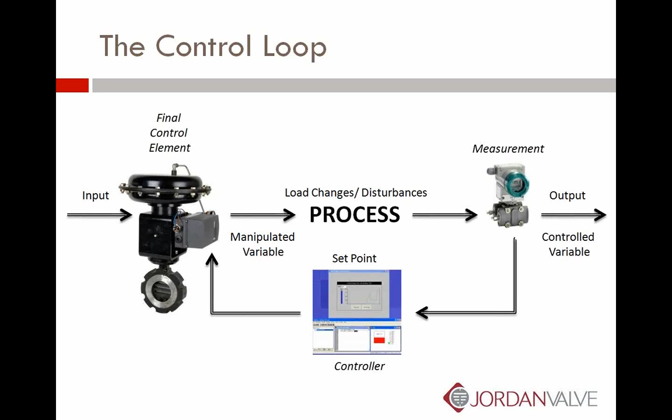A control loop. Wonder why a control loop, but I put a control loop up there because most people are familiar with control valves and control loops. It's one of the things that they teach in school, but they don't necessarily teach people about regulators. But regulators, you'll find, do a lot of the same things that control loops do.

The three major elements of a control loop are the sensing element, which measures the process variable being controlled, and that sends an output to the controlling instrument. The controlling instrument, or controller, calculates the error, which is the difference in signal from the sensing element and the desired set point, and sends a corrective signal to the final control element.

In a control loop, the final control element, which is the control valve, varies the flow to change the controlled variable to the required set point. So basically, a control valve is kind of a dumb device, and it needs something to tell it what to do. We're going to see that regulators have a lot in common with control loops.

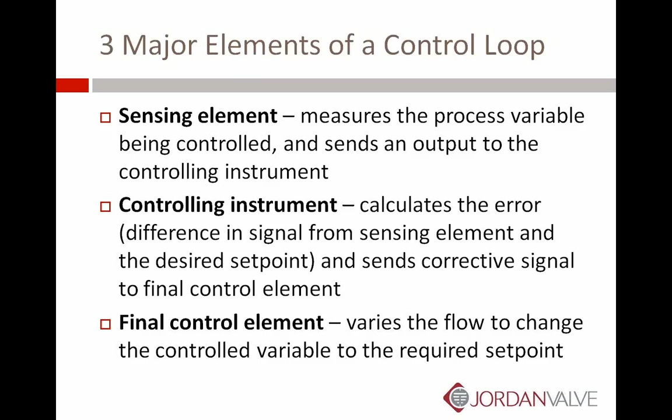Here's a quote from a gentleman named Hans Baumann. He says, properly utilized, regulators could replace control valves in at least 25% of all control loops. The reason this is a significant statement - for those of you who know who Hans Baumann is, you probably already know, but he's an inventor and engineer.

He has over 200 patents. He's a PhD in mechanical engineering. He's been published in the Instrument Engineer's Handbook, Control Valve Handbook, Noise and Vibration Control Engineering Handbook, and he also developed the Masoneilan Camflex valve, the Cashco Ranger, and the Baumann Little Scotty valve.

So here is a dyed-in-the-wool control valve guy, obviously one of the biggest influences in the development of control valves of the past generation, and he's saying that regulators could replace control valves in at least 25% of all control loops. Strong statement from a control valve guy. What does that mean to you? Regulators can be a great savings, again, in the proper application.

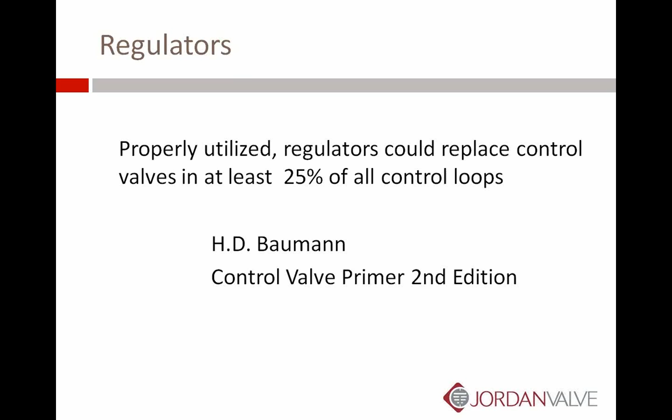Now, here you see a cutaway picture of a regulator, fairly simple device. You have a spring in the spring housing. You have the body of the valve where you have a diaphragm that rests between the spring housing and the valve body, and then you have a valve plug.

This is a cutaway of a pressure reducing valve, or what we call a PRV, and we want to control the downstream pressure, or the P2. When we talked about those similarities between a control loop and a regulator, you can see here that the spring acts as the controller, the diaphragm acts as the sensor, and the plug and stem mechanism make up the feedback mechanism. As the downstream pressure is sensed, it acts on the diaphragm, or the sensor, the pressure sensor in this case.

As it overcomes the spring, it will drive the spring up, and in this case, closing the valve, because you want to cut the pressure off once you reach the desired set point. As the pressure falls, again, the spring will overcome the diaphragm, moving the valve back to the open position. So it basically does the same thing as a control loop, only in a much smaller package.

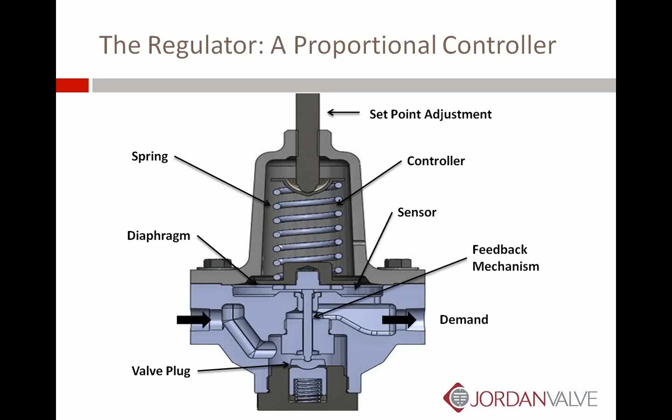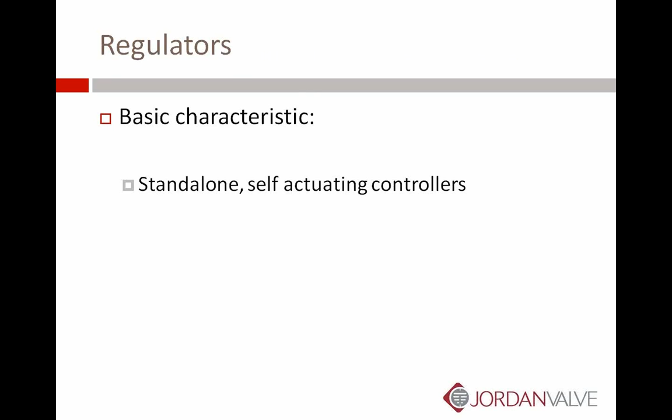Now we're going to give some things away to be able to take advantage of the simplicity, and we're going to talk about that as we move through the presentation today. So a regulator, the basic characteristic, you can consider it a standalone, self-actuating controller. What should you expect from a regulator?

All of the things we're going to talk about here are somewhat relative. So we're going to talk about accurate regulation. Is it as accurate as a control valve? No. However, you can have accuracies in regulators anywhere from 70% accurate to about 98% accurate, depending upon the regulator.

That you choose. Tight shutoff. Again, if you have a metal-seated valve, typically you're going to achieve ANSI Class 4 with a hard seat, and you can achieve ANSI Class 6 shutoff if you have a soft seat.

Fast response. Faster response than a control loop, because all the external communication doesn't have to take place when you're using a regulator. Minimum maintenance.

As you saw in the cutaway we looked at just a minute ago, there are not a lot of parts. It's a fairly simple design. Some manufacturers actually have smaller valves, 2-inch and under, that have no soft parts. There are no O-rings, there are no gaskets, really no soft parts to wear out at all. So minimum maintenance is simple, if needed at all. By design, they're low noise, and it's a low initial cost.

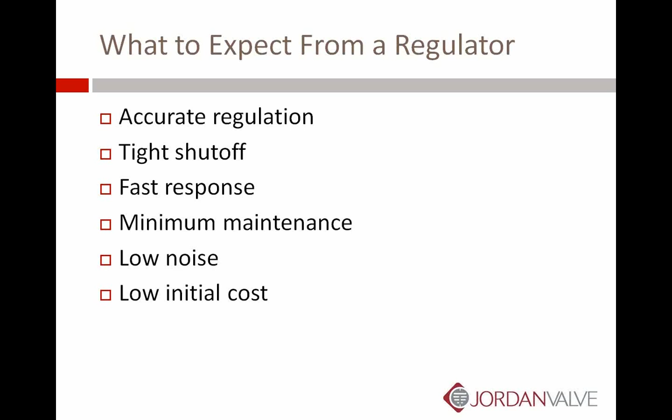And one important part on the maintenance element: if you have a control loop controlling pressure and it's not working correctly, you have a lot of different components to check. Is it the sensor? Is it the valve? Is it the programming of a PLC or DCS? There's a lot of different things that you have to check, whereas if you're using a mechanical device and you're having an issue, then troubleshooting is going to be a lot simpler.

Advantages of using a regulator. No external power is needed to position the valve. So you do not need air, you do not need electric, you don't even need an operator to go out and stroke the valve. No need for separate measuring elements or feedback controllers.

Once you go out and put the regulator in line and set it to your conditions, it is going to do what you set it up to do for a long, long time. Again, the designs tend to be simple, providing low cost, high reliability, and easy maintainability. The absence of stem packing eliminates external leakage and a high source of friction.

And regulators are in direct contact with the controlled variable and offer very fast response. As we saw in the cutaway, as the pressure acts underneath the diaphragm, it'll compress the spring, and depending upon whether it's a pressure reducing valve or a back pressure regulating valve, it will then move the sealing member to the appropriate position.

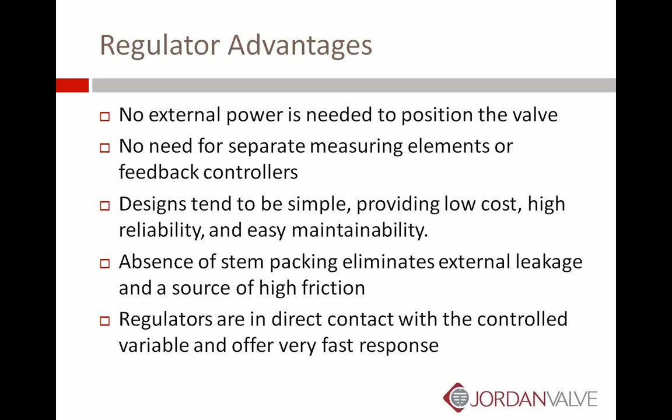Regulator limitations. The controlled media must be relatively clean and benign as materials of construction are limited. This has changed somewhat over the last several years. There are some manufacturers now that actually manufacture regulators in exotic materials. So the benign piece of this tends to not be as big an issue as it was in the past. However, the relatively clean aspect is still important.

Most manufacturers will actually recommend putting a strainer in front of a regulator as part of the preferred installation. Regulators lose controllability when the pressure drop across the valve becomes small because the media cannot supply enough operating power. If you have an extremely low delta P in a valve, sometimes that can be a problem. Many valves will actually state a minimum delta P requirement.

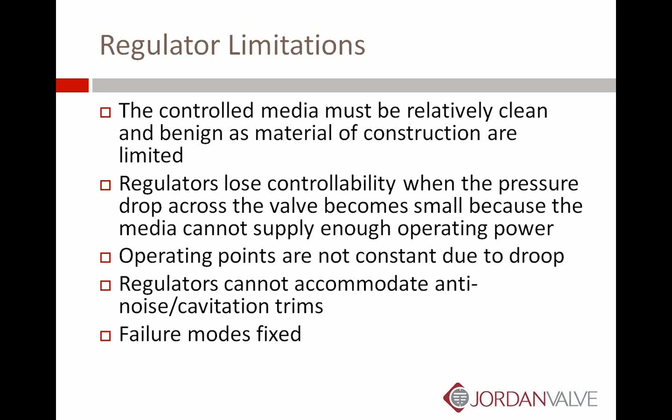Operating points are not constant due to droop. That's a term that may be new to some of you on the call today, but we'll cover that in the next few slides and talk about droop and how it relates to the accuracy of the regulator. But there will be some inaccuracies in the control just due to the design of regulators in general. Regulators cannot accommodate anti-noise or anti-cavitation trims, and failure modes are fixed. So those are some of the limitations that you run up against and you need to consider when specifying a regulator for an application.

Do not use a regulator when the desired pressure or temperature set point is beyond the range of a regulator. This one seems like a bit of a no-brainer, but again, this can be due to design, this can be due to materials of construction. Sometimes because of pressure and temperature considerations, you may have to move out of a regulator and into a control valve.

Don't use a regulator when process offset cannot be tolerated. If you need to be accurate within 1 to 2% or less, you're going to have to go to a control valve. Don't use when the pressure drop is extremely small or extremely great.

Don't use when a fail-safe feature is required. So if you need one to fail open or fail closed or fail last, you can't necessarily do that with a regulator. Sometimes, because of the way the valve is built, that might work out for you, but again, if you just have to pick one, it might not always be doable if you need a specific fail position.

If the system requires control of a multivariable process or if feedback is required, those are times when you want to avoid using a regulator.

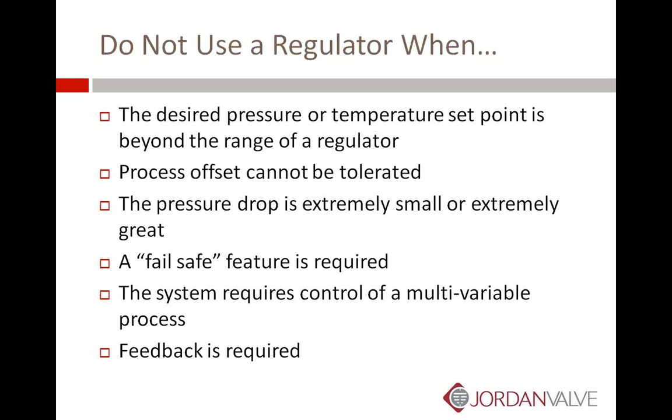Okay, here's that word droop again, or inaccuracy in regulators. It's also known as, or you might hear it referred to as, proportional band or offset, but it's the deviation from the set point as flow increases through the regulator. This is normally expressed as a percentage.

So if you have a set point of 100 psi, and when you get to full flow through the regulator your pressure is 80, then you would have droop of 20%, or 80% accuracy in the regulator. So the pressure falls below the set point in the pressure regulating valve. In a back pressure regulating valve, it's called build-up or gain.

Generally, the lower the droop, the better the regulator. Manufacturers typically specify ranges from 2% to 30%. Now, an important thing when you look at that, you think, oh, that's a massive range. And in fact it is, but you'll see where 3 different types of regulators each own a chunk of that 2% to 30% range. You have one type that's going to be 2 to 5%, one that's 5 to 10%, and the last, self-operated or direct-acting regulators, are going to take up the rest of that 10% to 30% range. So there is a hierarchy that we're going to discuss in regulators, and all 3 types are going to make up that 2% to 30%.

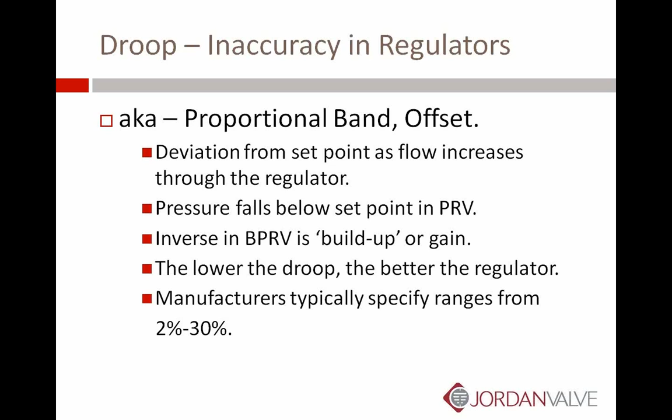Okay, there are 3 variables that determine droop in pressure regulators. Stroke length - the shorter, the better. So the shorter the stroke, the more accuracy you're going to have in a regulator. The diaphragm area - the larger, the more accurate. You see tank blanketing regulators with massive diaphragms, and those are ones where you don't want to see much droop and you need incredibly accurate regulation.

But that's not reasonable for manufacturers to put those massive diaphragms on every regulator that they manufacture. Additionally, oftentimes in your applications, you're not going to have the room to accommodate some of those massive diaphragm areas. And the diaphragm material has an impact here as well.

And then spring rate - the lighter the spring, the more sensitive the regulator. So you want to have a spring, or specify a spring rate in your regulator, that includes, of course, your set point, but is as close to that set point as you can possibly have, because that's going to give you much more accurate regulation.

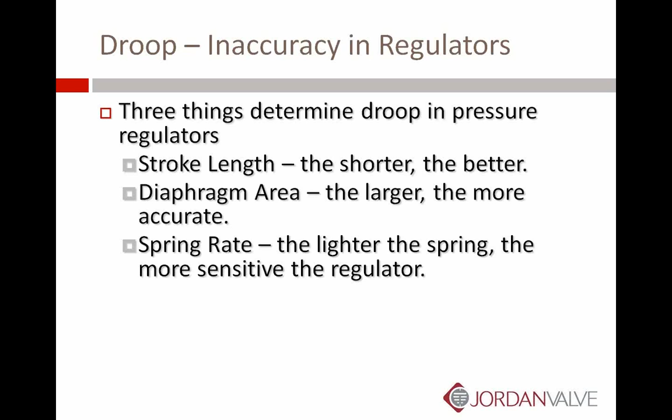This is a typical droop curve. You can see, if I can get my pointer to work - hopefully everybody can see that - but here's your set point. Let's say, for instance, this is 100 psi. And the regulator will droop off, and let's say when you get here, moving towards full flow, you get to 80 psi. So again, expressed as a percentage, you'd have 20% droop based on this particular curve.

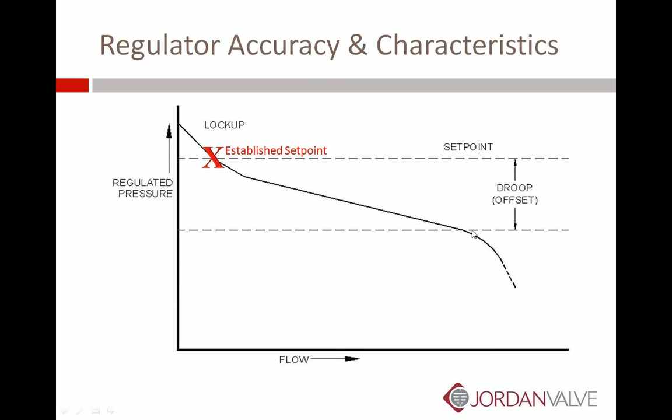Regulator sizing. A lot of problems - and one of the things that will help in the accuracy of regulation - is correctly sizing the regulator. And at a minimum, the information needed is the required flow capacity of the valve.

Usually users will always have normal, but it always helps if you have minimum, normal, and maximum. And if you have a minimum of 1,000 pounds an hour, but you have a maximum of 20,000 pounds an hour, that means you're going to have to be able to accommodate a 20-to-1 turndown. So that's important information to know.

Inlet pressure to the valve, obviously, and the outlet pressure or P2 - so in a pressure reducing valve, that's going to determine the set point. So, again, your inlet pressure could be 150 psi, and you want to reduce it to 80 psi to use at other places in the plant. So that's why that's important to know.

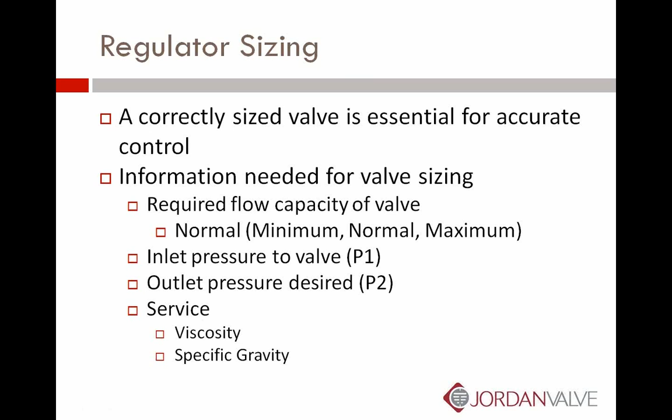And also the service - the media, viscosity, and specific gravity. So generally, the more the manufacturer knows, the more they're going to be able to help you choose the right regulator for your application. Generally, you can use an ISA control valve data sheet.

A lot of the same material or information is going to apply. At a minimum, the requirements are inlet pressure, outlet pressure, flow rate, and the medium. The more manufacturers know about your process conditions and what you're trying to do with the valve, the better fit you're going to get, and the best service life you can possibly get. So have that minimum, normal, and maximum condition, temperature, service, viscosity, specific gravity, and so on. The more information a manufacturer has, the better they're going to be able to work with you and put you into the right product.

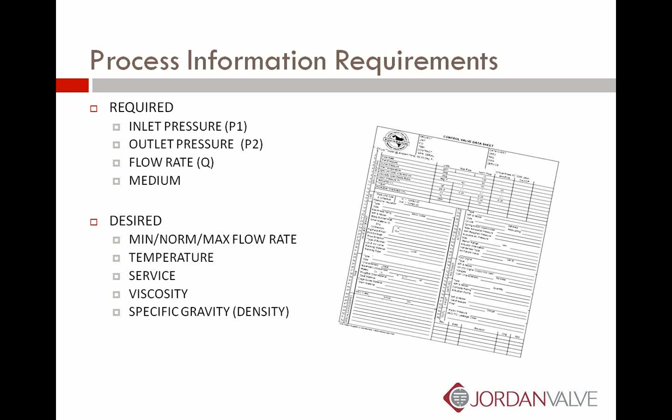Piloted regulators, this is where we have a small pilot valve that runs a bigger valve. So you have enlarged diaphragm surface areas on the big valve, and your droop comes down to 5 to 10%. So very much more accurate than a self-acting or direct-acting regulator.

And then finally, you have air-loaded regulators, where the spring is eliminated. So one of the three variables that go into the droop equation goes away. Droop here is generally in the 2% to 5% range. Sometimes you can even improve on that a little bit. But basically, what you're talking about here is regulation that's going to rival a control loop.

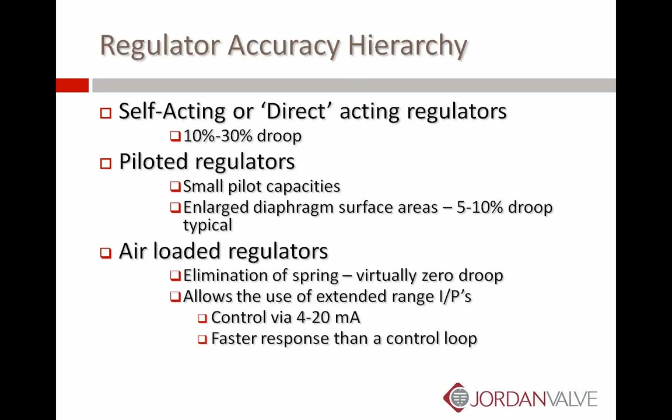So when you're looking at self-operated, it's faster and lower cost initially. Pilot-operated regulators offer higher accuracy and greater capacity. So those are a couple of things you want to consider when thinking about choosing a regulator.

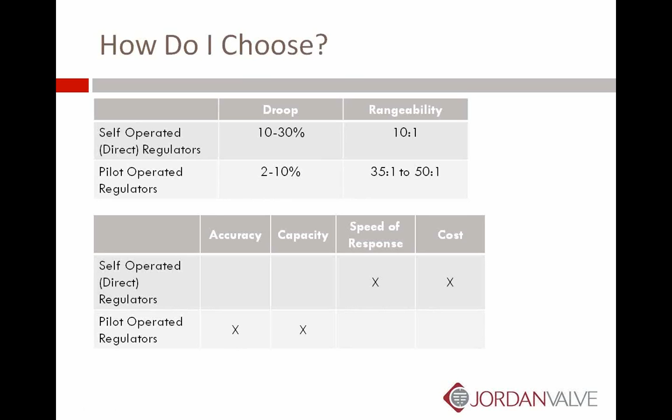Pressure regulators, or pressure-reducing valves, normally called PRVs, are self-operated devices which work off the medium alone. What this does is lower the inlet pressure to the desired set point. So we're talking here about controlling pressure only.

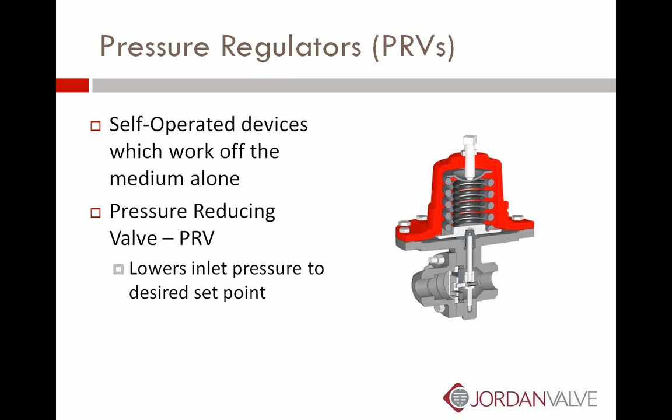Here's a cutaway of a pressure-reducing valve, and again you see the spring, the diaphragm. Here the sealing member is a little different than the one we looked at earlier, but you have your flow, which is P1. Let's say it's coming in here at 150 psi. You want to take it down to 100 psi, or P2, your controlled pressure, downstream pressure here. You put it in, you set it to your conditions, and it's regulating to 100 psi.

How does it do that? In self-operated valves, especially in smaller diameter valves, they have an internal pressure registration so it senses the downstream pressure up along the stem and up under the diaphragm. When this is in the normally open position, the springs keep it that way. So when you hit that set point and start to exceed it, the pressure acts on the underside of the diaphragm, compresses the springs, and takes the seats to the closed position. As it senses the pressure falling below that set point, the springs will overcome the line pressure and push the valve back towards the open position. That's how this modulates and regulates the downstream pressure.

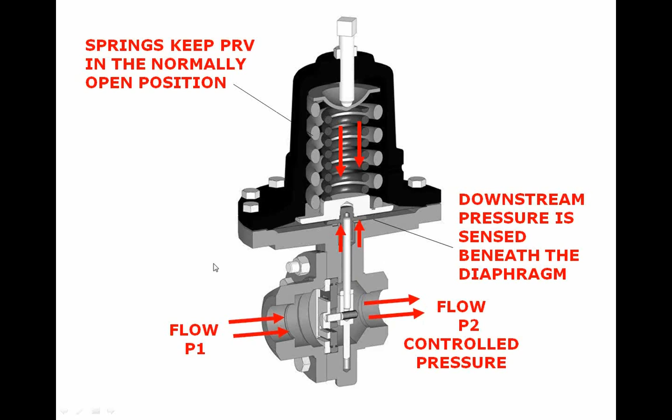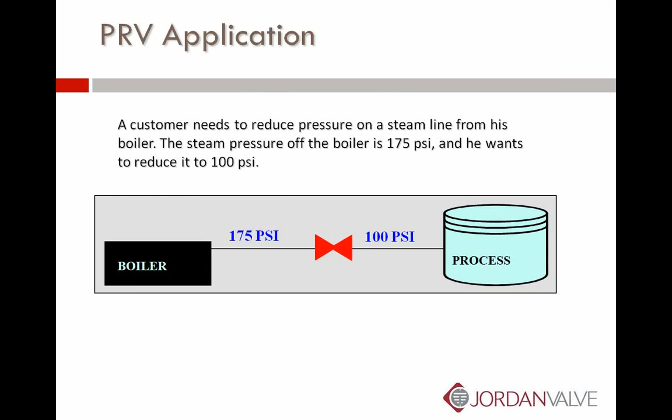Now we're going to start moving into that hierarchy of accuracy that we referred to earlier, and we're going to talk about piloted regulators. With a pilot regulator, the set point is determined by a pilot, which is a direct acting regulator, that controls the flow to or from the diaphragm of the larger valve.

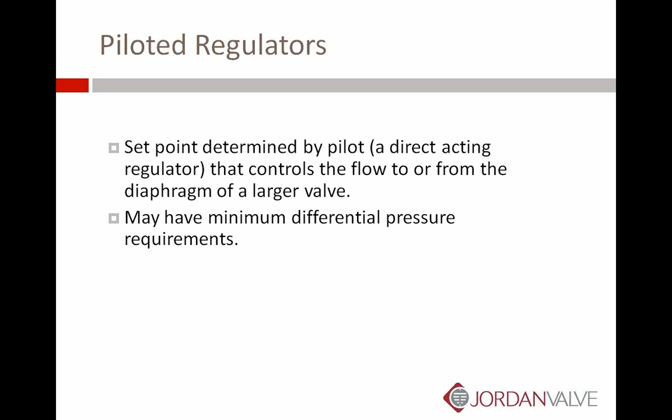Most piloted regulators do have a minimum differential pressure requirement. That will vary based on manufacturer, but normally they're in the range of 10 to 15 psi minimum delta P.

Extremely accurate. These are accurate now to within 5 to 10% of the set point, which, again, is much more accurate than a self-operated valve. Higher turn-down ratios, as high as 35 to 50 to 1. But again, it does require a minimum differential pressure and a downstream sensing tap.

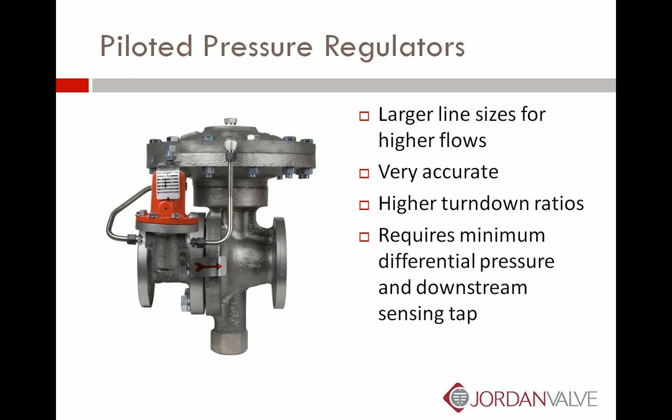On the self-operated regulator that we looked at earlier, that was an internally sensed or an internal registration. This is going to have an external registration, and underneath the diaphragm, you'll have a sensing line that's going to go sense the downstream pressure. That's going to send a signal up underneath the diaphragm to let you know, and you're going to control it to that pressure. You're going to respond to the pressure that's in the line.

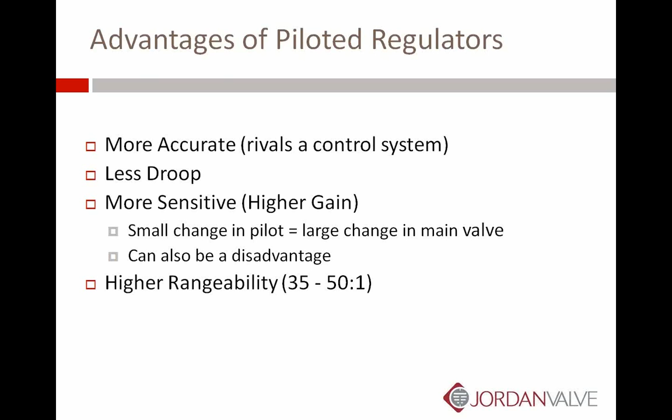The advantages of piloted regulators: more accurate. They begin to rival a control system. Less droop, again, 5 to 10% range. They're more sensitive, so a small change in the pilot is going to mean a large change in the main valve. This can also be a disadvantage, and we'll explore that in just a minute. And again, the higher rangeability, as high as 35 to 50 to 1.

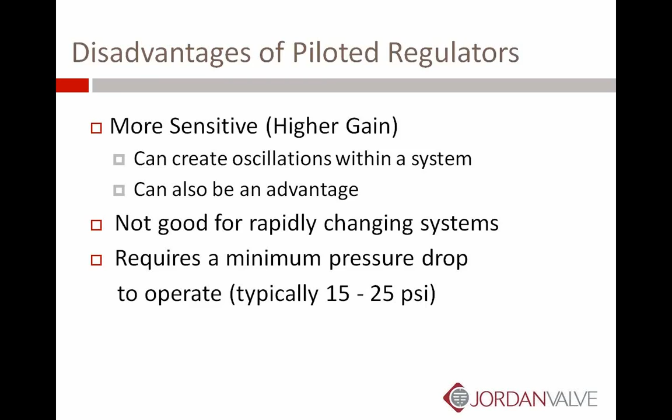You'll put an air signal across the top of the diaphragm, and that is how you determine your set point. So you need an air regulator or an I to P, but still this is much faster than a control loop. You have increased rangeability, low, if any, minimum delta P requirement.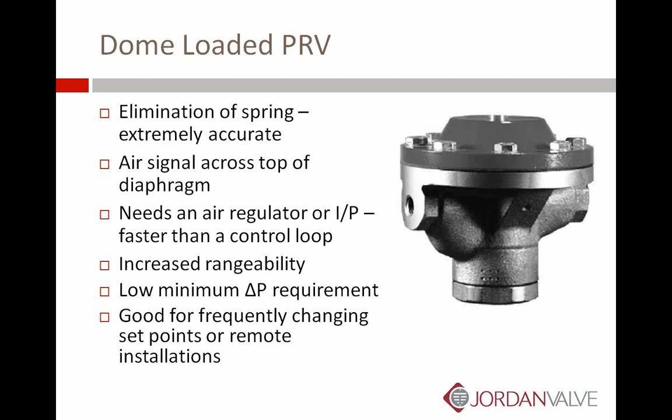These are excellent for frequently changing set points or remote installations. If you have a set point that might change several times a day or several times a week, you can take an air set or a point of use regulator and change the load on top, therefore changing your set point. Or if you have this 20 feet in the air, instead of having an operator have to take all the safety precautions and go up there and change the set point, this can be done remotely with a point of use regulator. So very handy in that regard.

Typical regulator applications: you have to use it in systems requiring control within 2% to 30%. And there are a myriad of set and forget functions: pump bypass, steam heating, pressure control, gas cylinder pressure control, tank blanketing, back pressure.

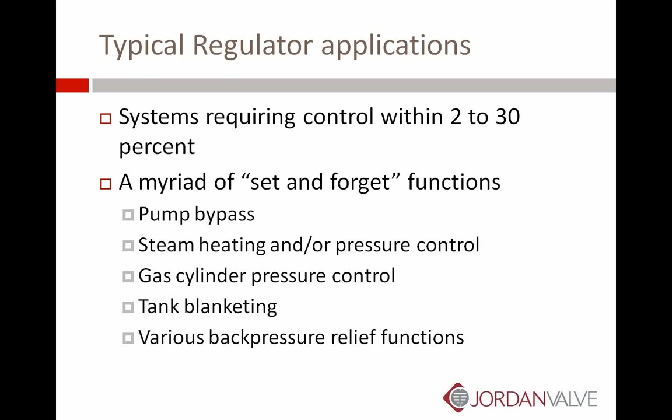You see regulators more than anywhere else in utility applications. So you're looking here, regulators tend to be excellent in steam, air and other industrial gases, both hot and cold water, lube oil, and any other utility application that you might be able to think of. Typically, regulators work particularly well there, and they're cost effective in those applications as well.

Now looking at back pressure regulating valves. These are designed to modulate and hold a specific back pressure. They're not a relief valve. They actually are modulating, regulating valves. They monitor and regulate upstream pressure here.

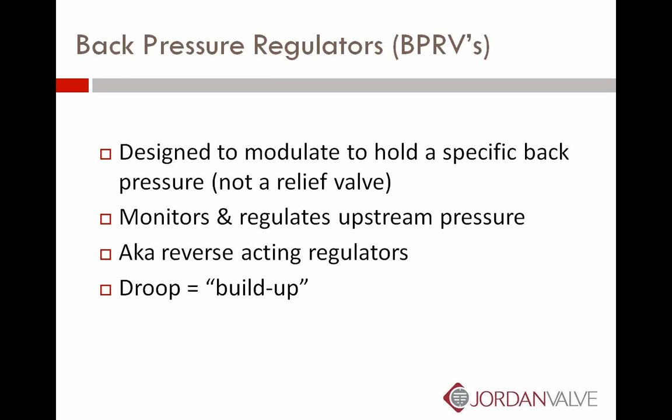When we were looking at pressure reducing valves, we were actually controlling the downstream pressure, or the P2. With a back pressure regulator, we're going to regulate P1, or the upstream pressure. They're also known as reversed acting regulators, and droop here is called build. So when you have a deviation from set point in a back pressure regulator, the pressure tends to build instead of droop.

Here's a typical back pressure application. You have a pump running, you have downstream demand. In this particular instance, let's say we only run 1 or 2 shifts. So at 5 o'clock, demand shuts down, but they want to keep the pump running. In order to avoid any kind of damage to the pump, as pressure starts to build back from where you've shut down the demand, all of a sudden pressure is building.

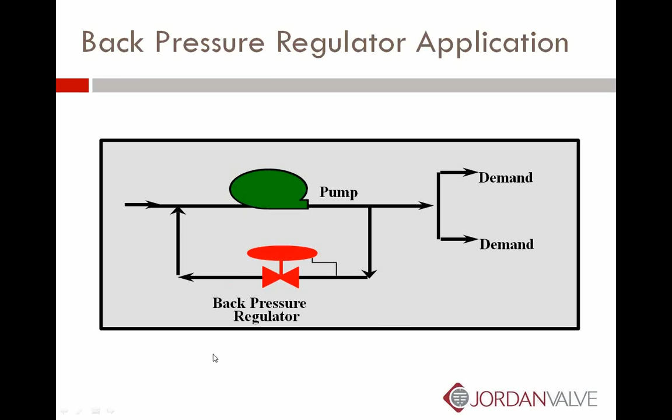You have a sensing device as part of your back pressure regulator, and until you meet or exceed your desired set point, this valve is in the closed position, but once you hit the set point, it will open, relieve the back pressure and control it so you can continue to run your pump. Probably 85 to 90% of all back pressure regulator applications are on pump bypass of some type or another.

Another type of regulator that you may see is called a tank blanketing regulator. These are used for gas blanketing or other low pressure air and gas applications. Extremely large elastomer diaphragms in these particular valves and very light springs. The reason for that is they have set points as low as 1 inch of water column.

Tank blanketing, or padding as it's often called, is the process of applying and maintaining a constant gas pressure in the empty space of a storage tank. So if you have, for instance, a volatile or toxic commodity, tank blanketing can prevent harm to workers, equipment, and the environment. If you have a commodity that's perishable, like a food or other substance, tank blanketing protects it from oxidation or contamination through exposure to air or moisture. So that's why people use tank blanketing regulators.

Normally, the blanketing media is nitrogen. Due to its inert properties, it's readily available, and the cost is relatively low. So again, you have blanketing regulators.

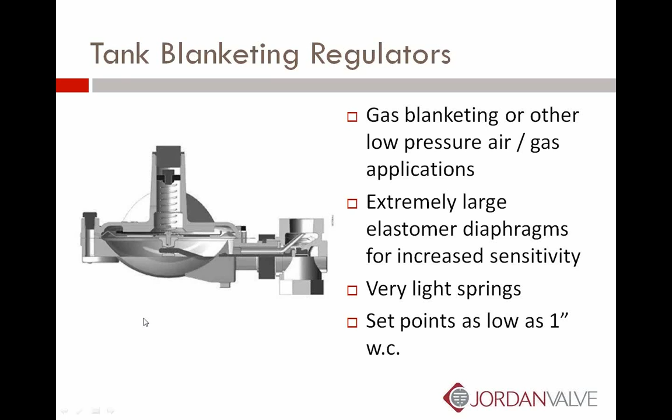Here again, we have self-operated regulators. The one in the cutaway in the picture here is actually an internally sensed regulator, but you also have piloted blanketing regulators, and a lot of them will actually have an external sensing line attached to where you want to regulate the pressure, which would be inside the tank, and it reads that pressure underneath the diaphragm, and that's what drives the valve.

Temperature regulators. Now, this is a little bit different, and again, we're talking about industrial regulators here. So these are very robust, self-operated devices in which the energy to position the valve closure member is provided by changes in temperature energy of the control variable. No air, no electric, no operator required to make these valves work. They're totally mechanical.

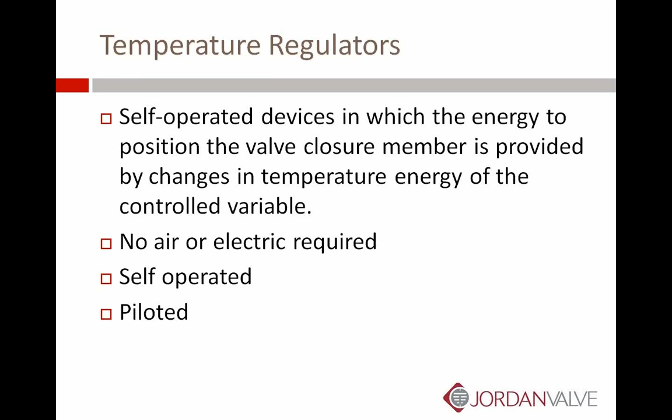Basically, what you have is a sensing bulb, and it's filled with a thermal fill that will have a specific boiling point. This will be placed in a thermal well, or in some cases they'll hang it in a tank, or in the ambient air, depending upon what they're trying to do with the valve. But there will be a thermal fill that will be within the end user's specification in terms of what they need to control temperature-wise. As this hits the boiling point, the vapor fill will boil off and drive an actuator, and the actuator will drive the valve to the desired position.

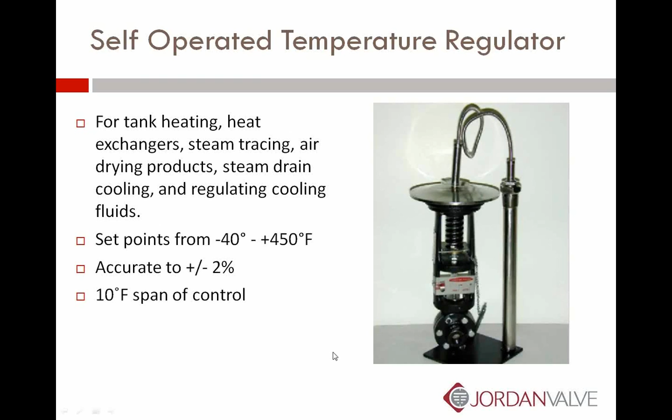Again, very accurate, totally mechanical. So it's a great option dependent upon the application. Ambient temperature regulators.

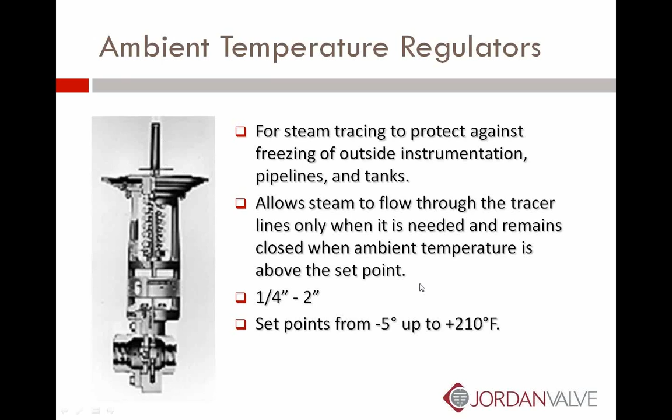Here, this is just sensing ambient air, so you no longer have the capillary and the sensing bulb, and this is for steam tracing to protect freezing of outside instrumentation, pipelines, and tanks. Again, no air or electric is required, and this handles ambient temperatures from -5 up to 210 F in terms of what the set point can be.

And finally, there are externally piloted offerings available in the marketplace. For critical temperature control applications, it's going to be more sensitive. In this case, the picture here is showing a temperature regulating valve acting as the pilot for the larger valve. So higher flows, you can have these as large as 6 inch in diameter, wider rangeability, just like piloted pressure regulating valves that we looked at before, and greater accuracy, again, because it's piloted.

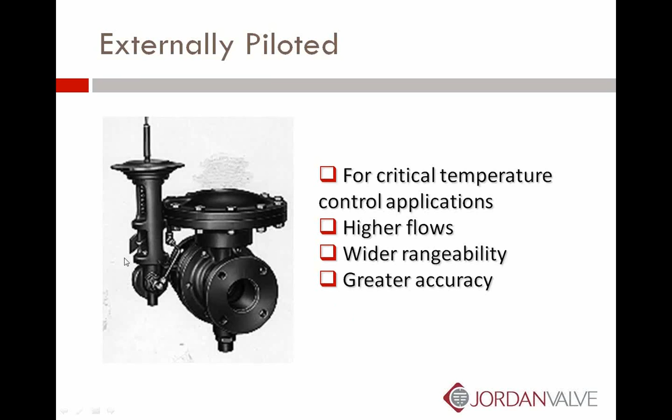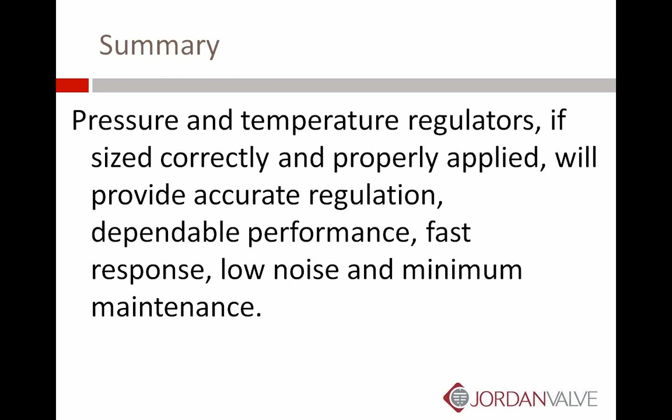In summary, pressure and temperature regulators, when sized correctly and properly applied, will provide accurate regulation, dependable performance, fast response, low noise, and minimum maintenance.

What to choose? Obviously, there are many applications for both regulators and control valves. The big question, and the question that you need to ask yourself, is, for my money, how much accuracy do I need?